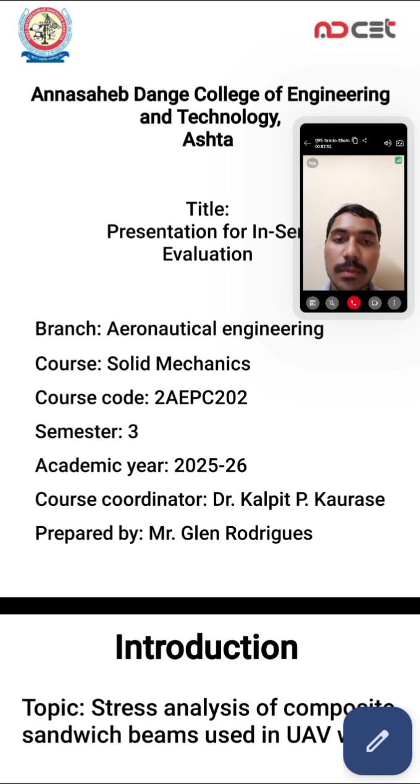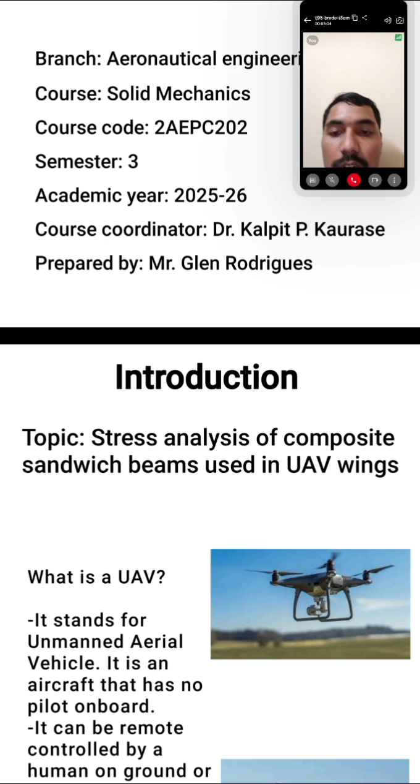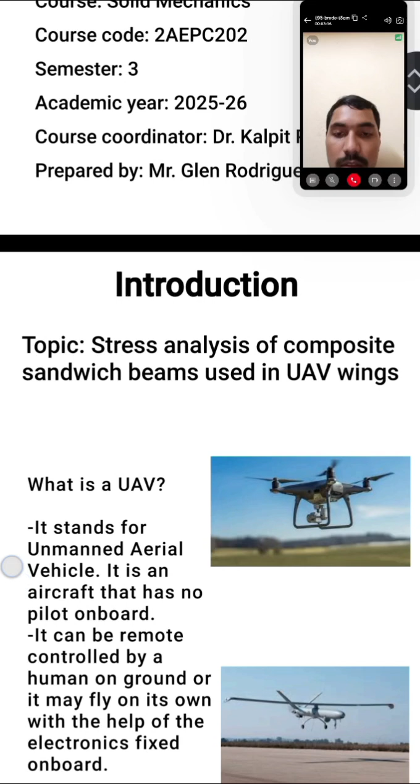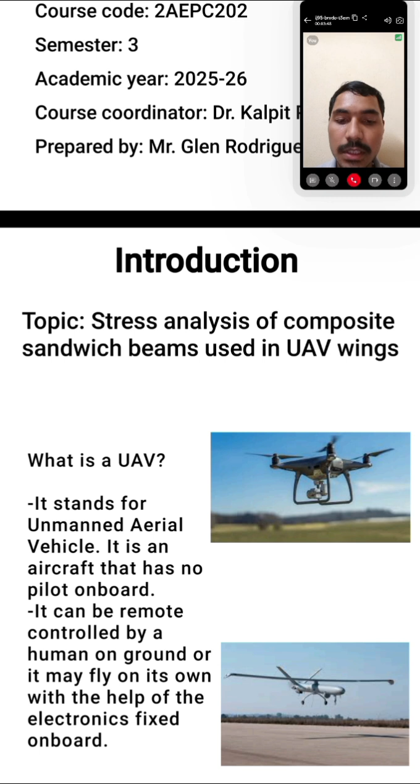Let us start with every detail of our topic. Our topic is stress analysis of composite sandwich beams used in UAV wings. What is a UAV? It stands for unmanned aerial vehicle, meaning it is a flying object in which no man is on board. UAVs can be autonomous, flying on their own with the help of electronics and computer systems fitted on board, or they can be remote controlled by a human on the ground.

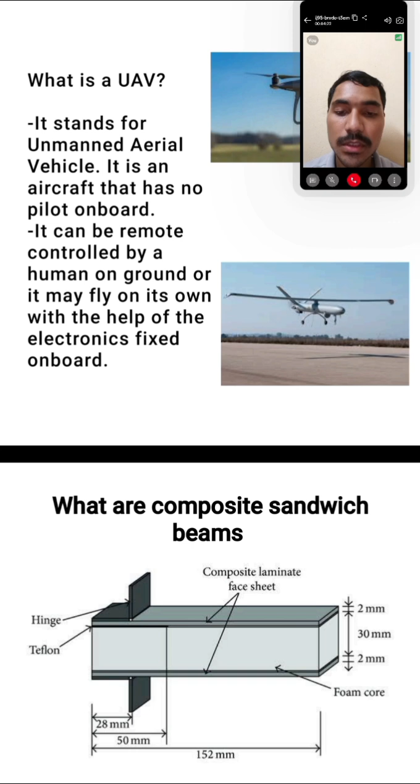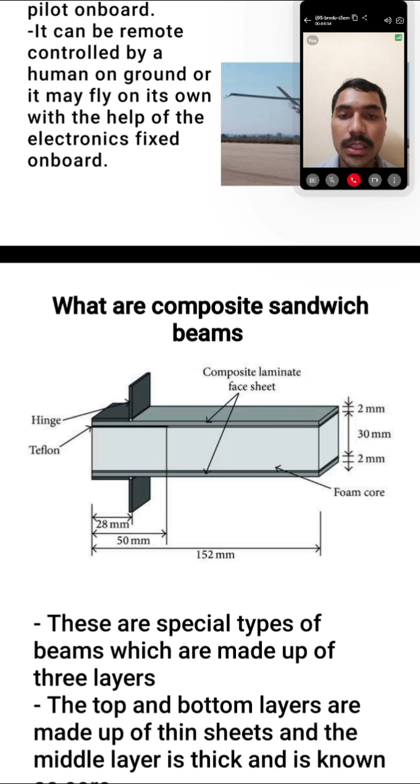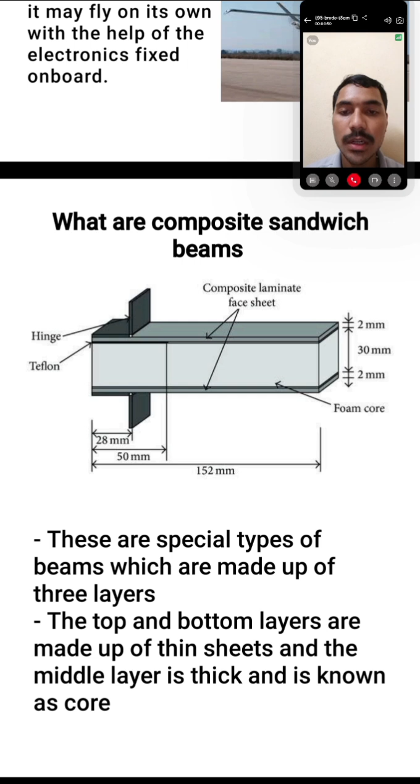Talking about composite sandwich beams, these are special types of beams which have three layers. Before that, what are beams? A beam is a structural component, a member of a structure which helps in bearing the loads acting on it. This is a special kind of beam called composite sandwich because there are three layers. The top and bottom layers are thin, whereas the middle one is thick. The thin layers are called skins and the middle layer is called the core.

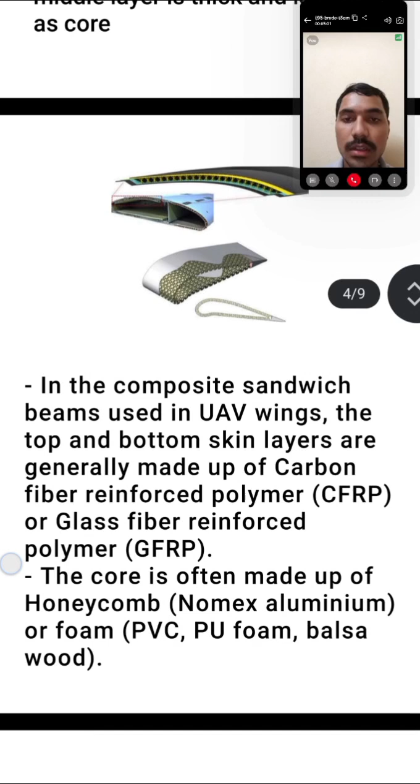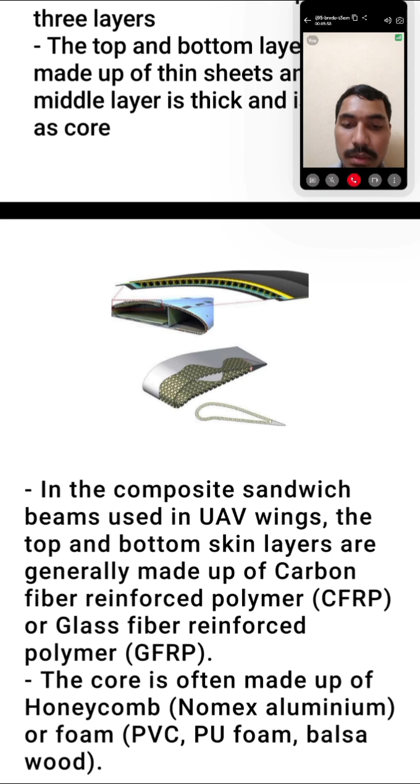These types of beams are used in UAV wings. The UAV wings are not always made of these beams, there can be other types also, but this helps in some ways. For composite sandwich beams used in UAV wings, the materials used for the top and bottom layers, the skins, are typically carbon fiber reinforced polymer (CFRP) or glass fiber reinforced polymer (GFRP). The core is often made of honeycomb, which is Nomex, aluminum, or foam. Other materials include PVC, balsa wood, etc.

Now let us talk about stress. What is stress? Stress is the internal resisting force per unit area developed inside a material when an external force is applied. Suppose if I have a rod and I pull it from both sides, then there will be a tension generated. The tension is a load, but stress is a different thing. Stress is the force divided by the cross sectional area of the rod. So if I have increase in load and also increase in area, the stress may increase or it may not.

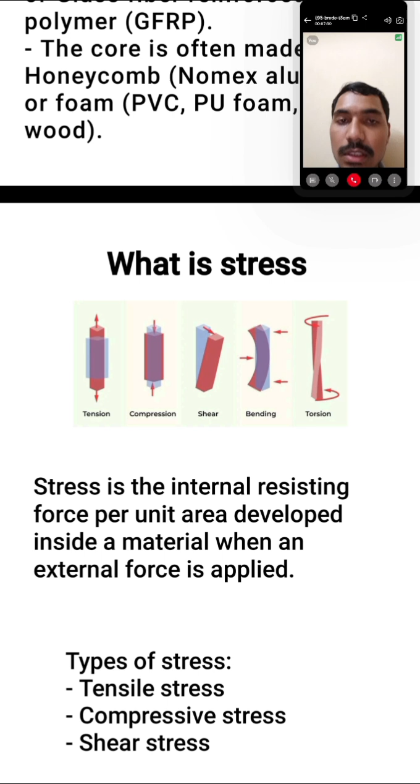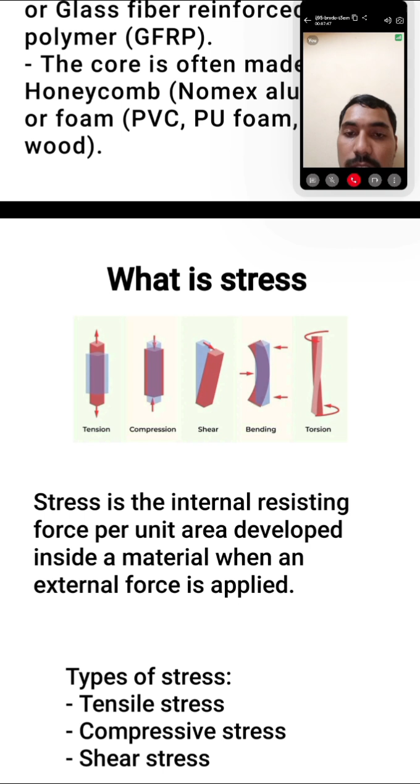For example, if I have 4 newtons of load and 2 centimeter square area in the first case, and in the second case 10 newtons of force and 5 centimeter square area, in both cases the stress is the same. The load has increased in the second case, but the stress has remained constant because the area also increased. There are different types of stresses. What I talked about just now was tensile stress. Then we have compressive stress, shear stress, bending, and torsion.

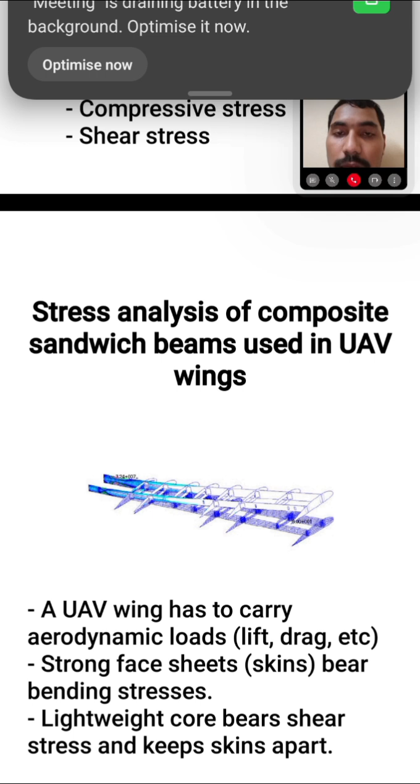Let's talk about stress analysis of composite beams used in UAV wings. A wing has to deal with aerodynamic loads. Lift is generated by aerodynamics, and drag is generated by air coming from the leading edge of the wing. These are all aerodynamic loads, and a wing has to bear all these load forces.

We have a distribution here. The face sheets, meaning the skins, bear bending stresses, whereas the core bears shear stresses.

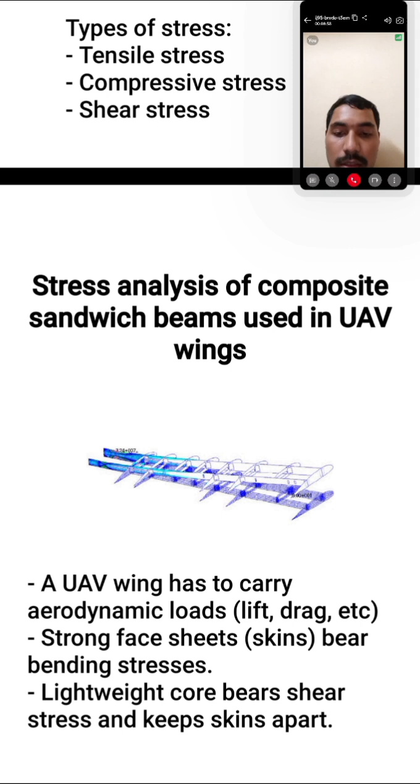Talking about the main stresses in the beam, bending stresses in the skins: due to aerodynamic loads, the wing tries to bend upwards. Due to this, there is compression in the top skin and tension in the bottom skin. This is because the wing tries to move upwards due to the aerodynamics in the air.

The shear stress is mainly handled by the core.

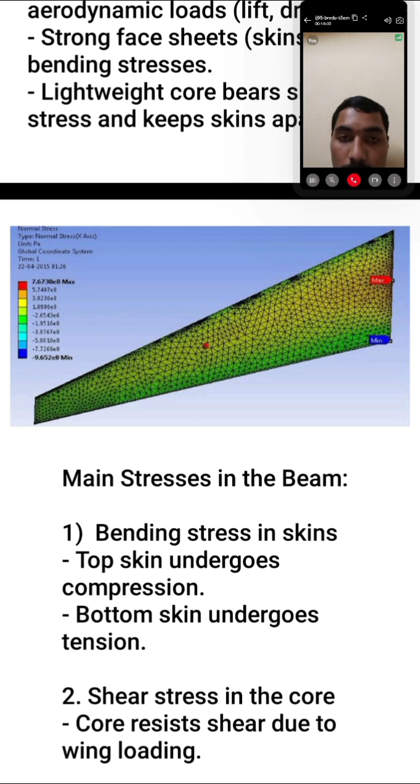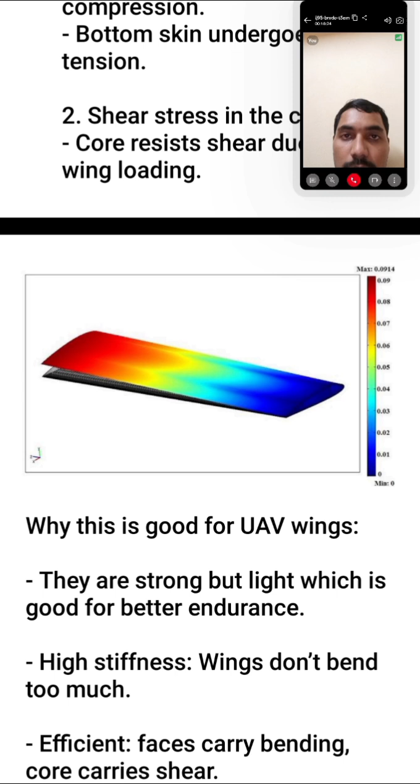Now why is this good for UAV wings? This composite beam type is good because it is strong and light, which is good for better endurance. What is endurance? Endurance is the total amount of time an aircraft can stay in air in a given amount of fuel. So if the aircraft's wings are strong as well as light, it helps it stay in air for a longer time.

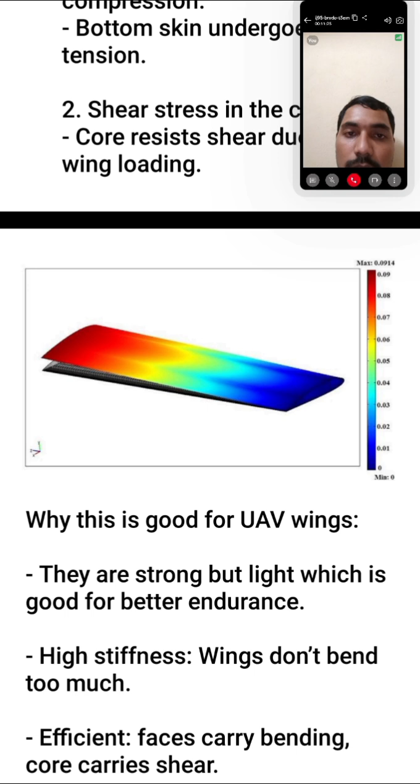High stiffness means the wings don't bend too much. If the wings start bending too much, they will cause problems, so this beam type helps the wing stay strong. This wing type is efficient because the loads are well distributed among the layers, the top and the bottom. The skins bear the bending stresses, whereas the core bears the shear stresses, so they have a good distribution of loads within themselves.

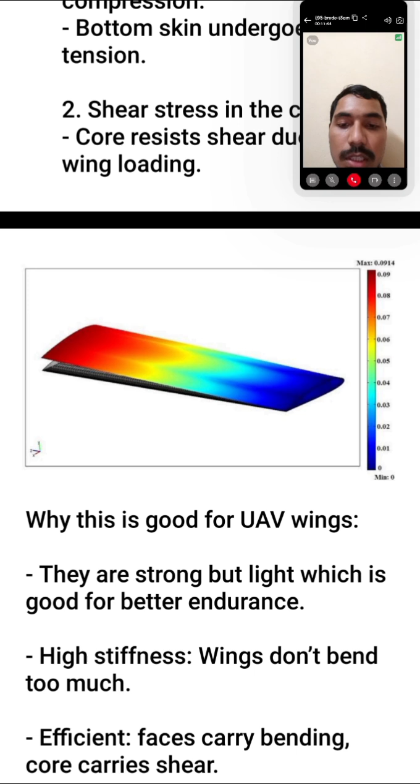In conclusion, in UAV sandwich beams, the skins carry bending stresses, tension and compression. The core carries shear, and together they make the wing light and strong. So this was the stress analysis of sandwich beams in UAVs. Thank you very much.